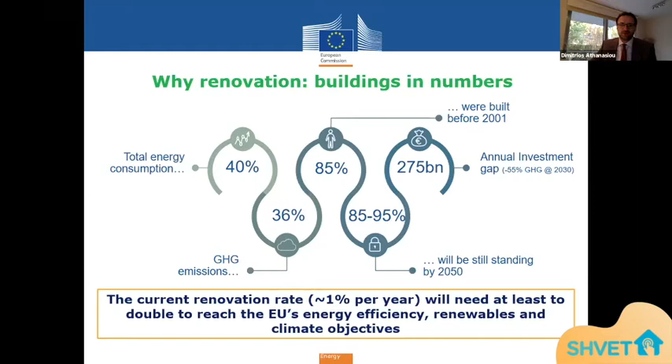Buildings are responsible for almost 40% of final energy consumption, as well as 36% of greenhouse gas emissions. Most of the existing building stock was built before 2001, which means they don't have current energy performance standards. The real problem is that the renovation rate is very low, around 1% as an average in the European Union, according to a study we have recently conducted. Unless we do something, we will never reach our objectives.

We have a well-established legislation for buildings, which is the Energy Performance of Buildings Directive, together with the Energy Efficiency Directive and the Renewables Directive. All this creates a solid basis for the energy market and the construction sector. However, the problem is that we need to find a solution and try to hold back barriers throughout the whole value chain for buildings if we are to increase the current low renovation rates.

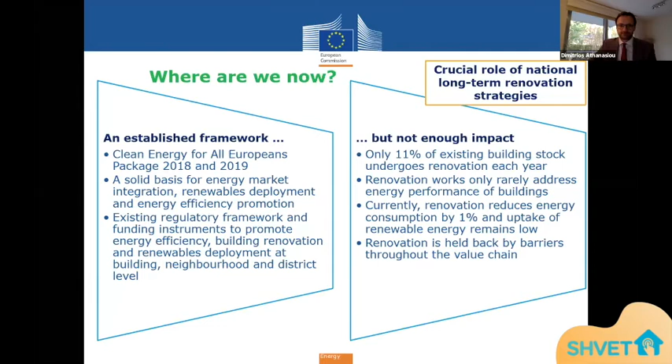As a follow-up of the European Green Deal, in the European Commission we had to develop a study, an impact assessment actually, in order to see how we will be able to achieve this new, more ambitious agenda under the European Green Deal.

For that reason, we came up with a new climate target plan for 2030, and the proposal of the Commission is that if we are to achieve the decarbonization vision for 2050, then we need to go at least up to 55% greenhouse gas emission reduction by 2030.

But this is the Commission's proposal, and it is now under negotiations with the European Council and the European Parliament. Of course, actions are required across all sectors, but buildings are without question a major contribution to achieving this goal.

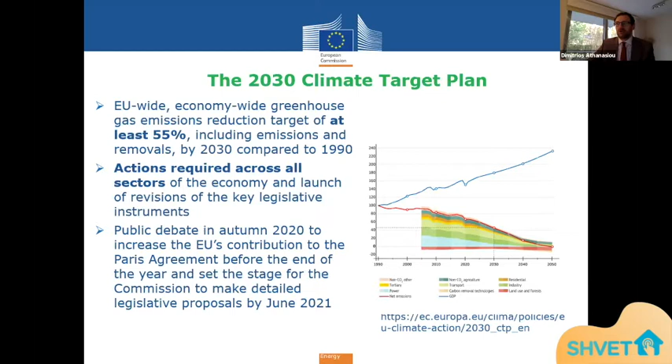This will require, according to the impact assessment, an enormous amount of actions, but I can briefly refer to some legislative framework updates that will be needed.

For example, I can refer to the Renewables Energy Directive and the Energy Efficiency Directive. Both directives need to be revised, not just to endorse the more ambitious targets, but also to see what measures are needed in the legislation to support this new ambitious agenda.

We can also talk about the update of the emissions trading system, the ETS, with a possibility to extend its scope to construction and transport.

And of course, after the adoption of the renovation wave, which I will be talking about later, we need to also see if a targeted review of specific provisions of the Energy Performance of Buildings Directive is needed.

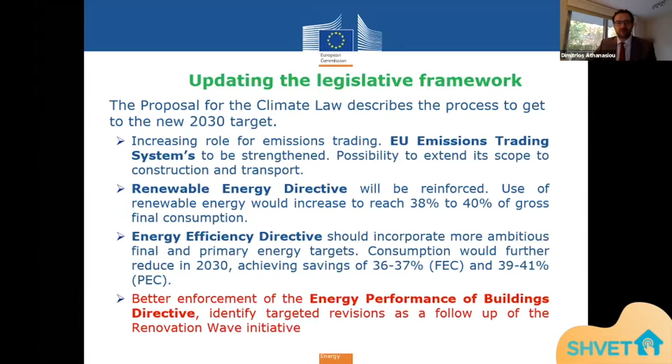So the renovation wave. The renovation wave was recently adopted on the 14th of October 2020, and it's a major initiative of the European Green Deal.

I can assure you that buildings are very high in the political agenda at this moment, and we found out with the renovation wave that buildings now fall under a more broader agenda. So it's not like it used to be 10 years ago, where the Energy Performance of Building Directive and energy performance standards were, let's say, the core of our business.

Or if I may say, the energy efficiency of buildings. Now we can see the agenda is broader: digitalization, which is part of what the discussion is today. We can see circularity, sustainability, aesthetics. So it's much more broad, and I will provide some thoughts during my presentation.

So the renovation wave took the form of a strategic communication, accompanied by an action plan with concrete legislative, financing, and enabling measures for the years to come. It also includes actions at all levels: local, regional, national, and European.

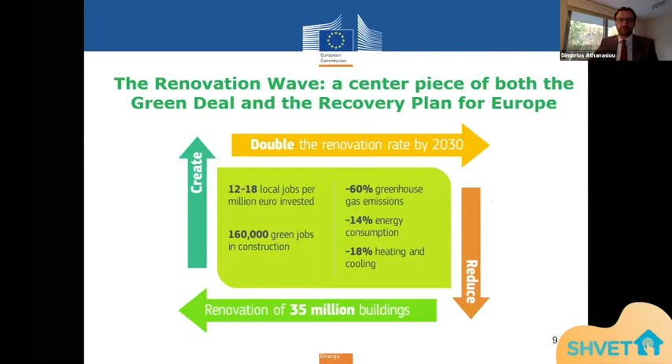So let's go back to the renovation wave. The key principles of the renovation wave, as I mentioned before, now it's broader. It's not just about energy performance of buildings. It's about a horizontal application of the energy efficiency first principle. It's about affordability of housing and energy poverty. This is a very big issue. So after all, it's about putting citizens at the center and seeing how we can make buildings more affordable to citizens, but also how we can endorse better health and environmental standards.

It's also about integrating renewable solutions and decarbonization of the heating and cooling system. It's about life cycle thinking and endorsing the principles of the circular economy. It's about the digital transition. This is something I copy-pasted from the renovation wave communication about smart buildings, how we have to incorporate digitalization and new technologies in buildings and move to district and city level approaches. And finally, it's also about aesthetics and architectural quality, very important for the built environment in general.

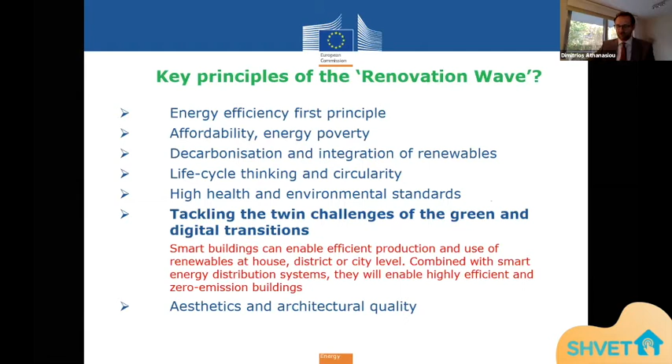There are many actions that we need to consider to actually make the renovation wave happen. It's about, first of all, strengthening information and legal certainty around buildings. So we're considering now, and this will be done through our proposal for a targeted review of the energy performance of buildings directive.

One option is to introduce mandatory minimum requirements. For example, when a building is to be rented out or sold, then this building has to reach a certain level of performance in order to be rented or sold. It's about updating the energy performance certificates. It's about the role of public buildings, digital logbooks, building renovation passports, many ideas that came up in the previous negotiation of the directive, but now we see the market is more mature and ready to incorporate these solutions.

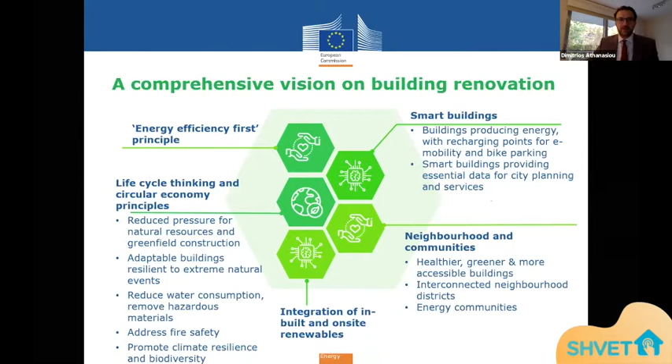I will speed up. Very quickly, it's also about the district approaches, but also the new European Bauhaus concept. Yes, smart buildings, neighborhood and district approaches, smart communities are very evident in the renovation wave. There are many things I would like to share with you, but we don't have the time.

The focus areas of this renovation wave are tackling and phasing out the worst performing buildings, and alleviation of energy poverty. It's about public buildings with special focus on schools, hospitals and care facilities, and decarbonization of heating and cooling, and also trying to think big, moving from just one building cell towards district, neighborhood approaches and smart cities.

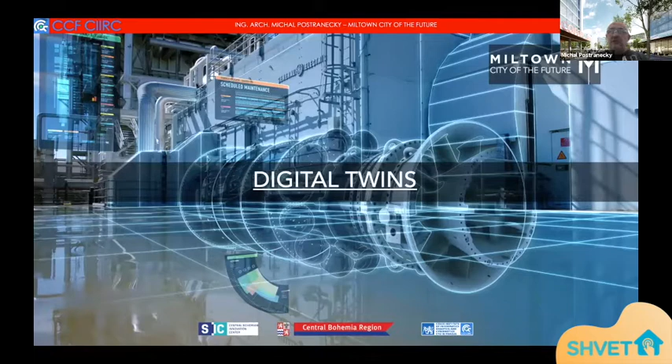We are heading through digitalization to another virtual world, using augmented realities, building digital twins, first before we even build a physical place. Not only a city or part of the city, but also a building or part of a building, where we can first simulate any process in this urban space we are looking at.

What we are looking forward to in the very near future are robots, and they will be involved in everything we are doing. Some of them will have low intelligence, some will have very high intelligence because of AI. We are talking a lot about autonomous cars, but robots for us will be much more important inside our buildings, and they will really build a new kind of behavior around the collaboration with robots. I believe we have to see them as friends, not only as robots who are taking our jobs.

So now I'm going to move very quickly to Miltown, City of the Future. It was the Governor of Central Bohemia, Ms. Pokorná Jermanová, who came up with this idea.

Our Center of the City of the Future was awarded with that project. The basic idea was very clear from the first moment: design a city with a unique DNA, which will be from the first moment actually very recognizable. The city should emerge and grow into a prosperous future, a city that cooperates with its surroundings and is a good neighbor. I believe it's very important, when you design and build something, that you care about your neighbors and want good relationships. So the vision was based on simple but very fundamental assumptions.

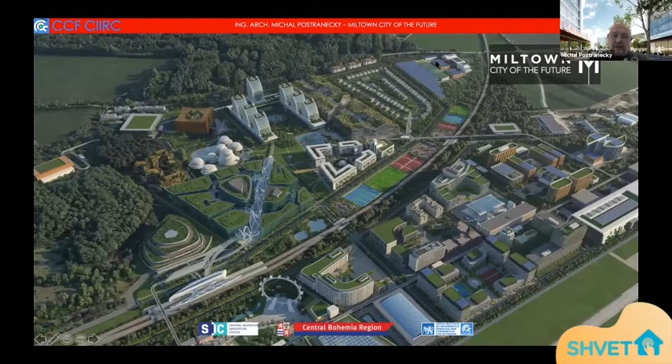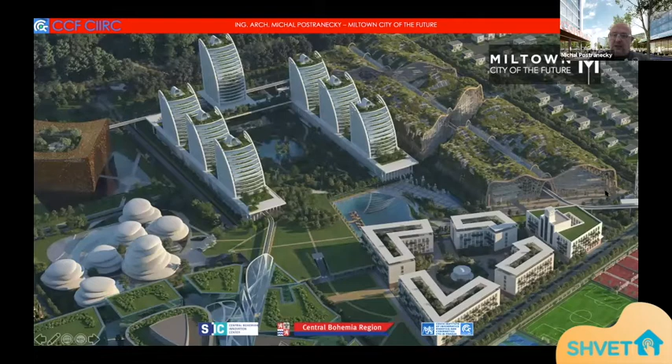You can see it from the other side, in bigger detail—this is our energy and waste center, and this is more residential. This is the heart of the whole project; I'll show you in detail now. You can see the green building is divided into 3 parts, but this is really the heart of it.

This is that university, a shared place for many universities coming together for specific research, education and research. This middle part or center part with those fins above is residential, but below there are four levels of research and different labs. Here you can see the Science Museum and Pentagon on the right side.

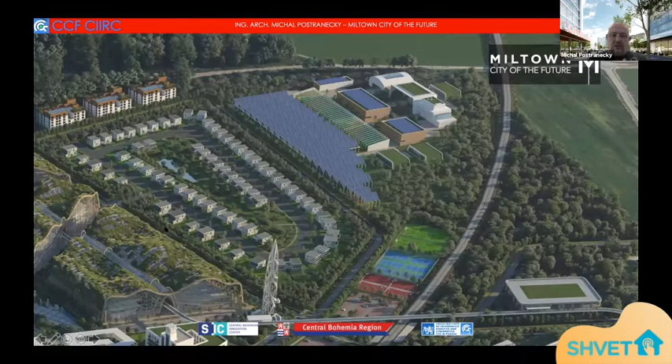Now in detail, this is the energy center and waste center, and we also have a lot of glass houses, because we are trying to connect the energy resources with the green city architecture. We dedicated a lot of space for sports, outdoor sports, but we also have a lot of hotels and galleries, and some government agency buildings.

We call it Pentagon. This is something of a shopping center combined with an admin center.

This is actually our transportation hub, because in the center of that location will be a new railroad, and this is actually a railroad station. I also built something called monorail that connects most of those main buildings, and we have garages, and the center of our mass transportation system, MaaS - mobility as a service, transportation service.

We also have buildings like this, which is actually a robotic rehabilitation center. So we have health as a part of our city as well.

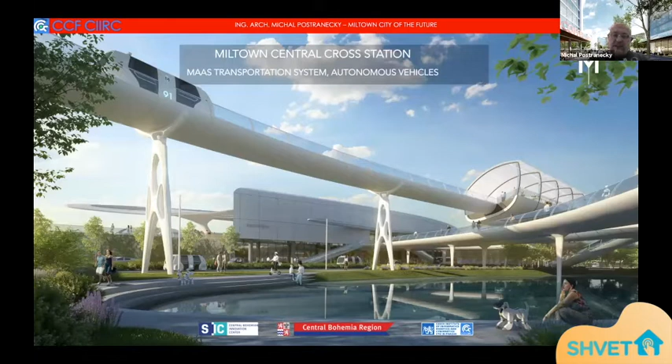A couple more pictures, visualization. This is the transportation hub, where in the back you can see the railroad station, monorail, but you can also see the autonomous ITS system and a lot of micromobility. It was a very big question how to organize all those modes of mobility together, and who will have right of way.

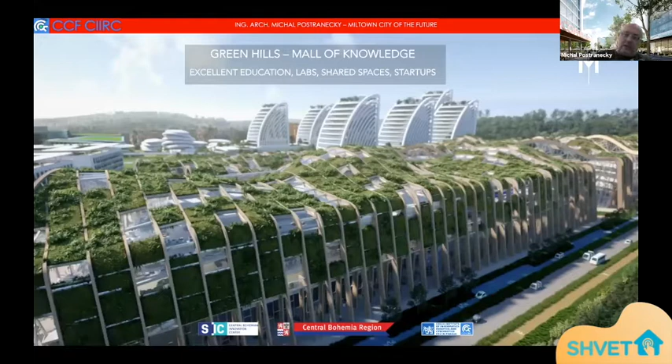Here, next picture - you can see we have a lot of water places and a lot of greenery in the whole area. I hope when we build something there in the future, we'll have a lot of green also on roofs and as a part of our structures.

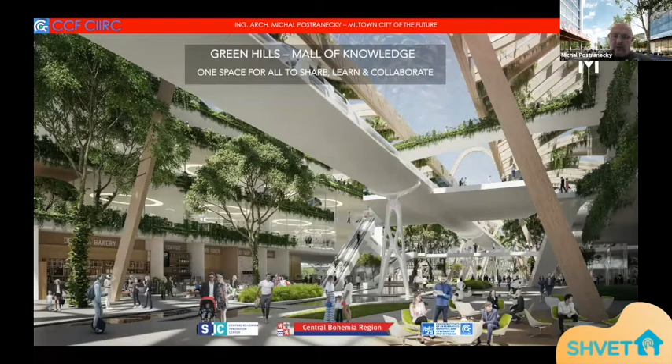This is what I call Green Hills Mall of Knowledge, at the heart of the project, where students and research are housed inside 3 big buildings connected together. I believe climate changes push us more inside buildings, but we don't want fully closed buildings, so I'm proposing big open spaces you can use and accommodate for your life 24/7, with less air conditioning, but a more natural type of air conditioning for those spaces.

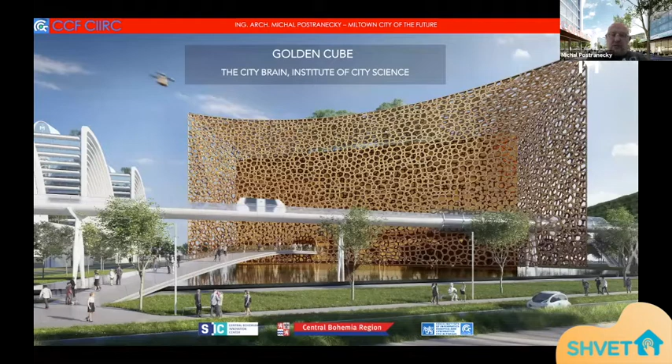This is, of course, where I was trying to place some architecture. This is the Golden Cube, the City Brain Institute of City Science. We expect that everything will actually be organized from here, but there will also be a lot of public spaces where you can meet and educate yourselves, because education is the biggest part of that.

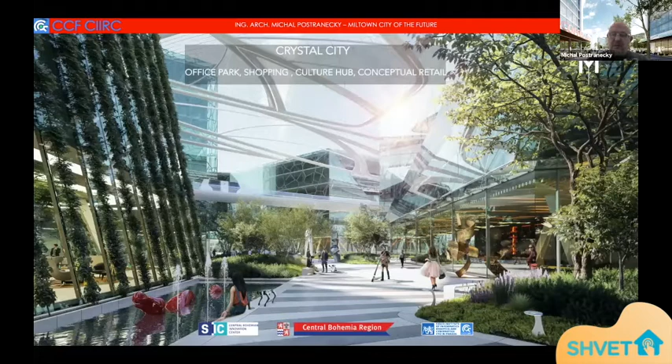Again, a very important thing - you can see we have inside spaces and outside spaces covered, so we can react to different climate changes. When I design something, I really like to have outside and inside connected together as much as possible, as green as possible. You can also see that monorail connecting all those main parts of the city.

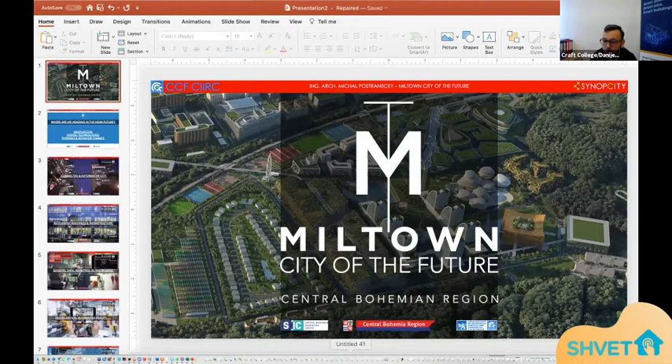So let's see what the construction sector says about new technologies and digitalization. We had a slight change of the agenda, so instead of Miss Ana Moreno, our next speaker will be Lorenzo Nissim.

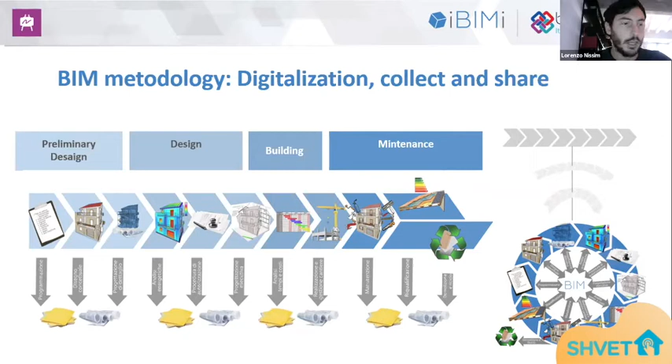And here we go to what we can see about the BIM methodology, that is actually a 3D model. Because it's much more complex, the 3D model has many information in it. Usually they are attached to a single object. So each thing that we can see inside the model is actually a database of information. And this is what can really improve the efficiency in the industry.

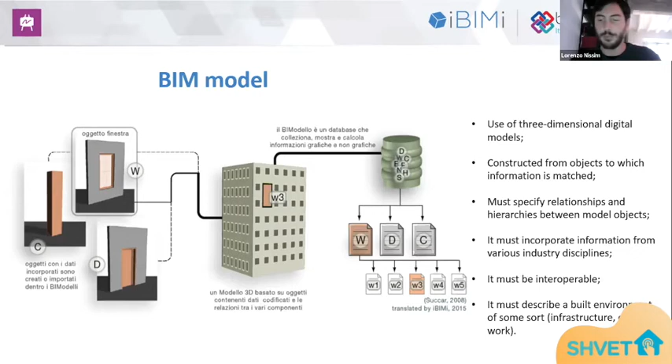And here, very quickly - we don't have time to discuss this - but when we are able to collect and exchange this information, we can really improve all the phases and the process of a building project.

Starting from a very easy visualization that we can have thanks to our 3D model, but then this can improve collaboration, and for what maybe concerns our focus today, all the data that we can collect can be used for analysis, and this, thanks to algorithms and software, can bring the design decisions we make on a design project to a higher level, because we can run very sophisticated analysis.

But again, we can take all this information just in our hand. We can go on site with all the information we need, or we can just download in a couple of clicks the exact number of products that we need to buy, so we can very quickly know how much some decision costs, and we can even improve prefabrication and so on. And this is all because we can have very valuable information and take good decisions thanks to that.

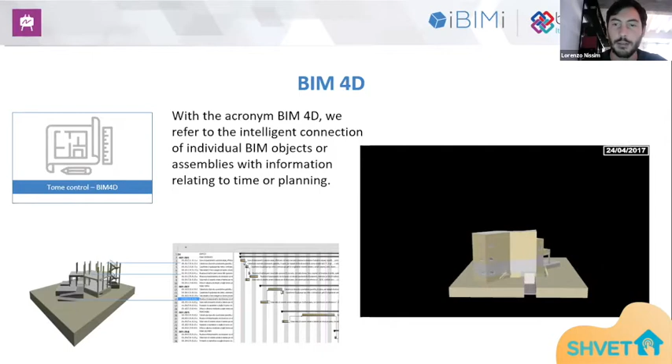And this data came from another actor, that is the architect, and so the building company can take this data and add some knowledge and can run this kind of simulation. This can be very, very quick, very effective.

This is just maybe the first step that we have to think about. So the idea is to collect all the data, and then we actually have a step further that we should consider, if the idea is to go in that direction that we saw in the past two presentations. So the idea that we collect all the data, but it's still some kind of static data. So once we collect that, we can share it, but basically it's not going to be modified.

So the next step is the digital twin. So the idea is that our digital building is actually connected to the physical one, and every time the physical one changes something or gets some new information, the digital one as well is updated with new data. But even the opposite is actually possible.

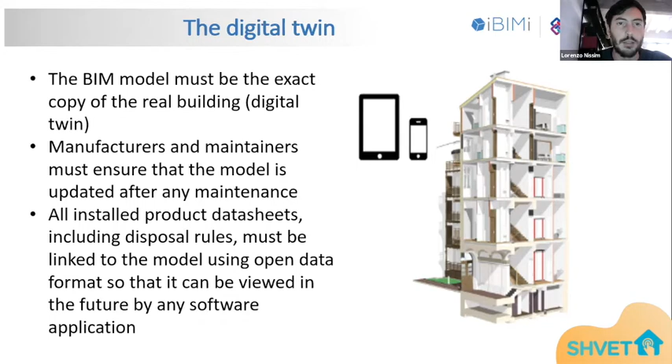So I can change my digital model, saying that I want different illumination, I want a different level of temperature and so on. And so my physical building makes the change. And so here the last two slides, and I think I'm in time, yeah.

Just to say what IBIMI, the Institute of Building Information in Italy, and Building Smart, that is this global non-profit association, are doing. So basically, what we're trying to do is to understand what is the business need of all actors involved in the building project.

And then thanks to a complicated process, we find the right solution to allow fluent exchange of data. And we involve all the software vendors in the world, the most important but even the smallest, and help them implement this solution. We're always talking about some information technology solution. So once the software house has implemented this kind of standard, all the professionals can use some tools, some software that allow them to talk in an easy way with the other actors.

These are some of the most important standards that have been developed. IFC is very, very popular, but there are many others.

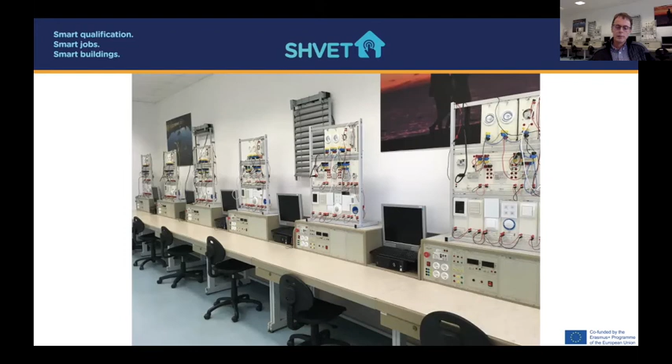Because none of the schools in Slovenia at that time had smart elements, we equipped all Slovenian schools with the learning modules we developed at our school. Even the teachers at these schools did not yet know about KNX technology, so the first thing was to teach the teachers all about KNX. We conducted two educational seminars for teachers that year, lasting 16 hours, so they could prepare students for the competition. The task for competitors was not hard, because this was the first time they programmed smart installations. This competition was an opportunity to equip all electrical schools in Slovenia with smart technology, and we did that.

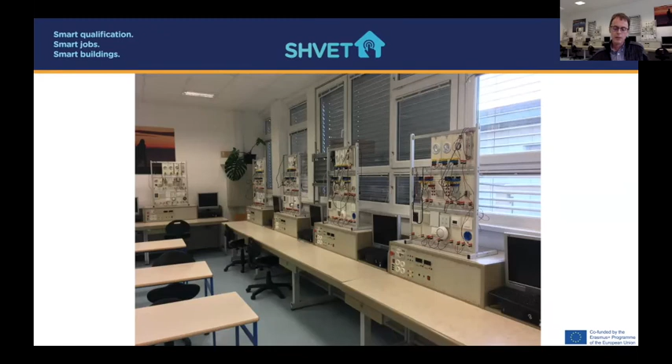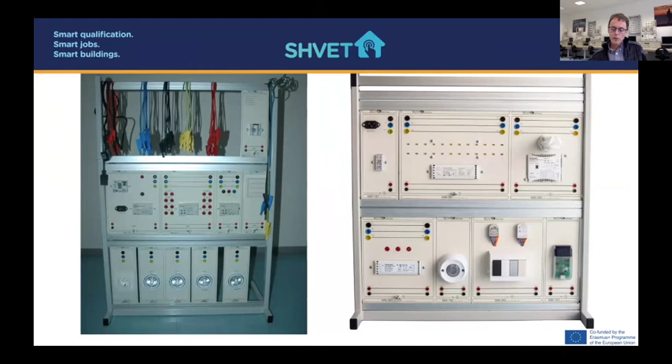Since that year, we have held 1 or 2 seminars about different smart systems, not just KNX, for electrical school teachers. So far, we have conducted different seminars for different levels of knowledge, from seminars for beginners to advanced and special seminars. At these seminars, teachers learn about new smart technologies, new systems, and new elements which they can buy from us and then use in classes. From every school, at least 3 or 4 teachers already attended one or more of these seminars.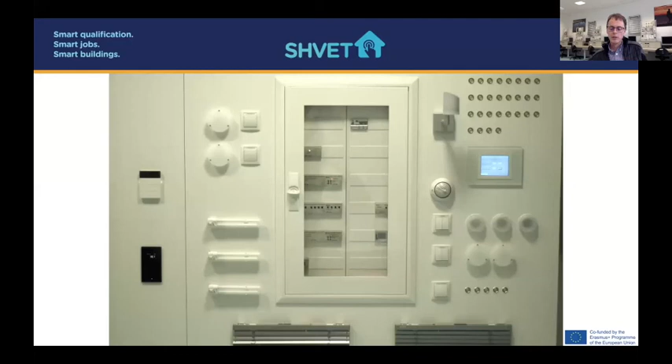Three years ago, our school was co-organizer of another national competition of electrical schools in Slovenia. The task was again to program a small smart installation, but this time it was a little more demanding, as students in Slovenia now know a little more about smart installations. The school where the competition took place only had 1 learning module, so for the competition's sake, we made 8 new learning modules for them. So you see, this is one way how a school can acquire new learning modules.

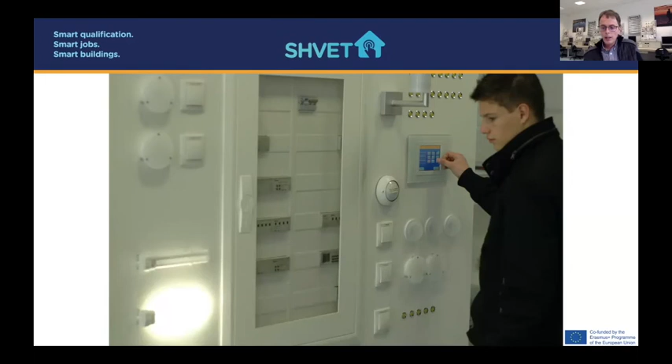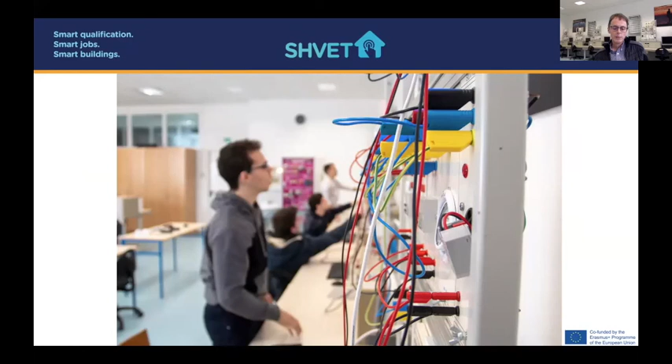However, we do not teach new smart systems only to students and teachers, but also others. In addition to teacher trainings, we also do seminars for those who work in industry and electricians that are self-employed. Every year we have held many such seminars as more and more people want to have a smart home. The number of this kind of seminar at our school is now rapidly growing. We started with 1 seminar per year, and now we have around 3 to 4 seminars for such participants. In all these years, we educated more than 150 electricians, not including teachers. In the last few years, we also had seminars about smart systems for unemployed people too.

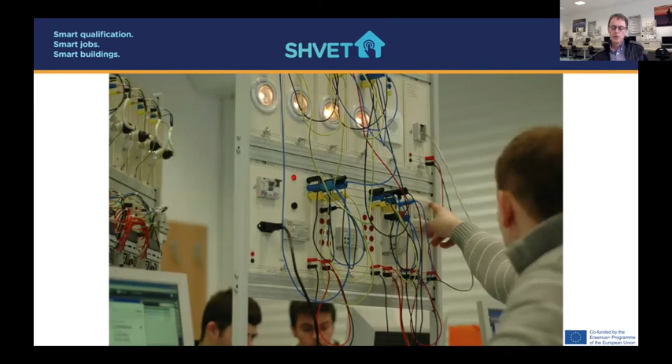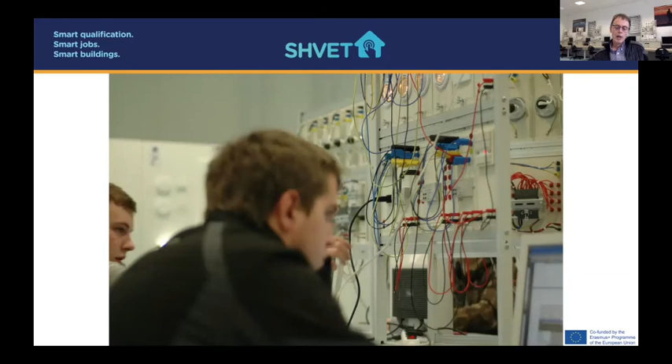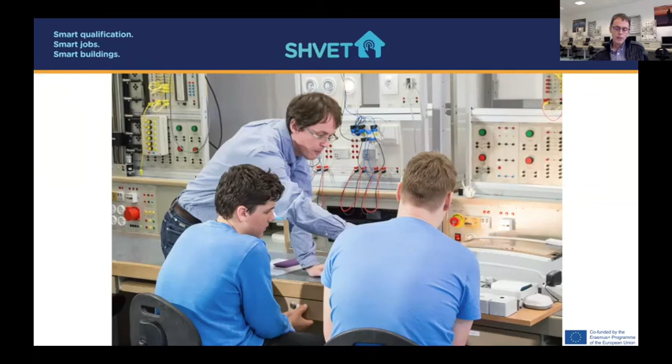In our school, students attending electrical engineering school have 1 optional course named Modern Installation Systems that lasts 16 hours. Most of these hours are devoted to laboratory exercises where students program different smart installation systems on their own computer and learning module. Similarly, students attending mechatronics school have a similar course named Smart House lasting 50 hours. But in our higher professional college, students who are to become electrical engineers also have an optional course named Internet of Things lasting 60 hours in 1 academic year. They upgrade their knowledge acquired in high school. A lot of them complete their education by preparing a diploma thesis in the field of smart homes.

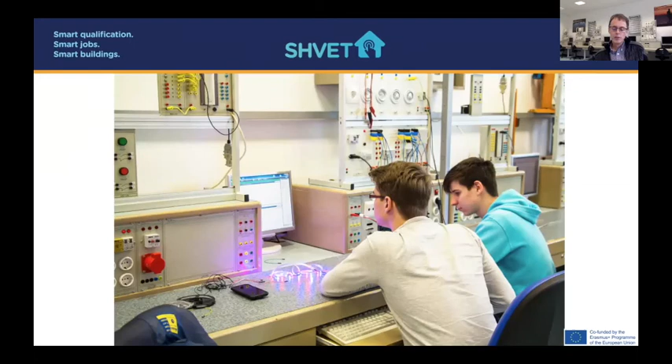You can find many different smart systems on the market today. Not every system is the best for everybody, so it is difficult to decide which one is the right one for you. You must not believe everything that a sales engineer says - he will sell you the one he wants to sell you if you are not careful. Because of that, we at our school think that nobody is or can be an expert in all smart systems. The school cannot teach students all different smart systems, but we can teach them one or two very well. More important than that, we can teach them how to decide which system to use in which case.

That was the reason why our school decided which 2 systems we will teach our students well. All of the other systems are given to students informatively. I'm glad that one of them is already mentioned, KNX systems, which is standardized all over the world.

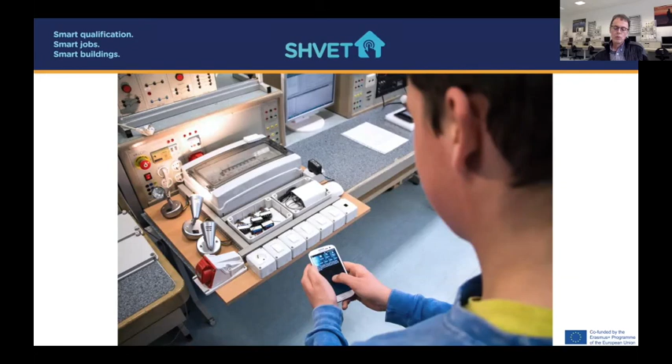Every year at our school, we have 1 week in school which we call project week. Every teacher suggests his or her own theme. My theme is always smart homes and smart systems. In this way, computer science students from our school who don't have such an optional course can also gain new knowledge about smart systems.

During all this time, I wrote some instructions, for example how to decide to have or not have a smart house, another one called Use of Smart Installations, and one named Which Smart Technology Is the Best for You. You can find a few of them on the internet. I also wrote a few examples for dummies on how to switch on or off the light, how to dim a light, and how to control the blinds using smart system technology. These are all written in such a way that everybody with knowledge of how to use a computer and some technical knowledge can start to build his or her own system.

A few years ago, we included remote control smart systems. This has been a must-have for several years now, and that is one more thing why students want to learn how smart systems work. They want to control everything with their smartphones. So every learning module in our laboratory contains an element that allows remote control of such installations.

Last year, we also included the increasingly popular voice control of smart installations. This can be achieved in a variety of ways. We decided to use a product developed by a Slovenian company, which works very well. Now students can control their installation using voice control too, with web assistants like Alexa, Google Home, or Siri. In addition, a smart house is not a smart house if it does not contain a visualization system.

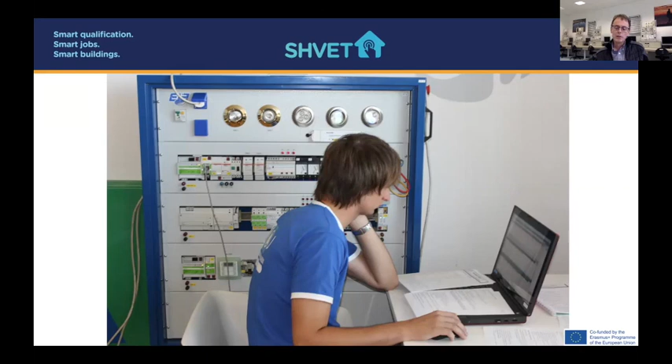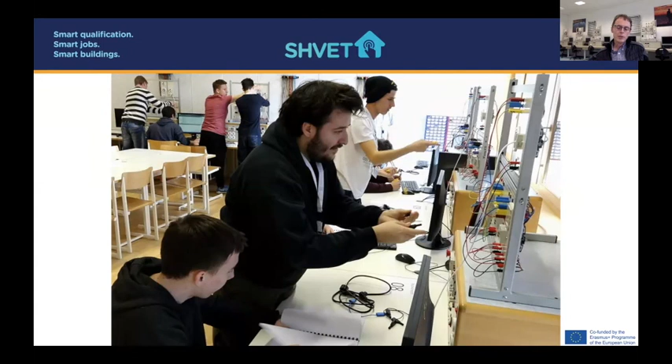There are many possibilities here as well. Every smart device manufacturer offers its own system. The problem arises when we have a lot of applications on our smartphones at once - one application for one smart device. So the solution to this problem is one single control system, one single application for all smart devices in our home. At our school, we choose one that allows this, and which we also teach.

I have to say that we at our school are ready and willing to participate in any kind of future trainings due to our own development and manufacturing of learning elements as well as instructions and examples. Just for the record, from 1994 we equipped all Slovenian schools with certified laboratory tables in which different instruments and elements are built in, and which are now used and are the same in every electric school in Slovenia and even in 2 Slovenian universities. So I can assure you that we are a reliable and trustworthy partner.

I would like to end my part of this video conference by saying that if a former student gets in touch with me and lets me know that he or she knows smart systems better than I do, then I did my job well. So that is the reason why I work where I work and I do what I do. Okay, behind you have seen some pictures from our seminars, from people in industry and in schools. So with this, I will end my presentation. Thank you very much.